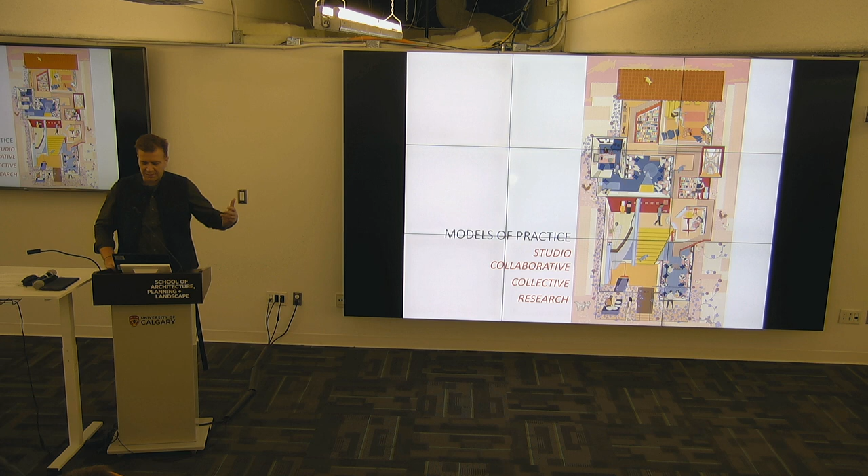This is all, of course, in retrospect and hindsight, that one thinks there are four models that have emerged within my own practice. The first one is, of course, very traditional.

It's the idea of someone coming to you to give you a project, and then you work with the person to produce it. Here, in this case, it's up in the north—a house built out of timber screens that open and close, located in a peri-urban part of a northern city. It's symptomatic of other such development throughout the country, where the architecture also tends to become a marker for development that is to come.

Or there's the idea of collaborative practice, where you often work in places with various actors who have a lot more skin in the game. You're constantly working with people to produce projects.

In this case, a temple that we built with local villagers out of stone, where the villagers would work on the project in their spare time. Between tilling fields, in their off-season when they weren't farming, they were physically building this community temple project. This is, in some sense, a collaborative effort.

So we played not just the role of the architect—and this is not the architect in the traditional sense—but someone working with the villagers and the priests to actually produce the design as well as the project itself. The third aspect of the practice is this idea of the collective.

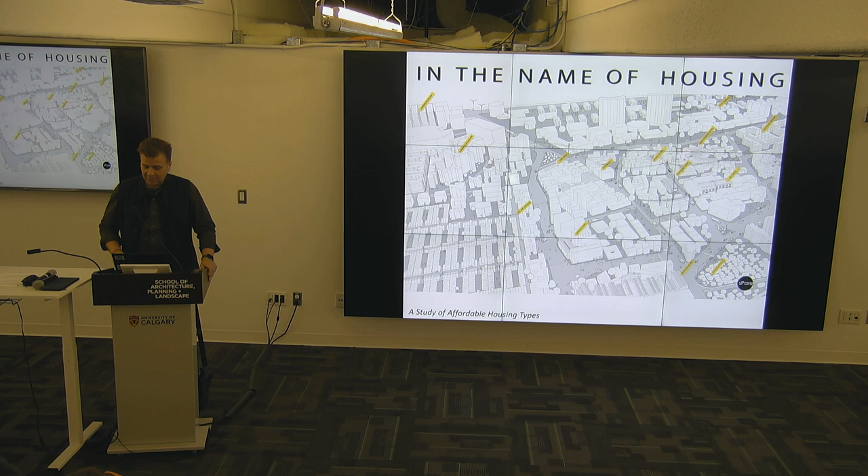And lastly, the 4th model that we've been working through is this idea of research. Typically what happens in our context is that research is seen as something academic and not really connected to practice. What we've been doing really is research that is looking at housing and housing type, as well as building code, in a way that it can inform both policy and hence inform practice as well. So that's really the kind of models of practice that we operate through.

The second part of the presentation is really looking at questions that we've been asking ourselves in the practice, and looking at how these questions play out within the value propositions that we need to address across many projects, but also specifically in the few that I'm going to show.

The first one is: how lightly can you actually touch the ground? The fact that you're working with resources that are extremely valuable and will keep becoming more and more scarce. Is there a way for us to actually start looking at, through various techniques, to try and lessen the load that natural resources would be consumed on particular projects?

When the client first suggested that we work on that site, we were a little apprehensive because of the number of trees on the site, and we were wondering if there was a way for us to actually build without impacting a single tree, and what the connection between that grove and the actual project would be.

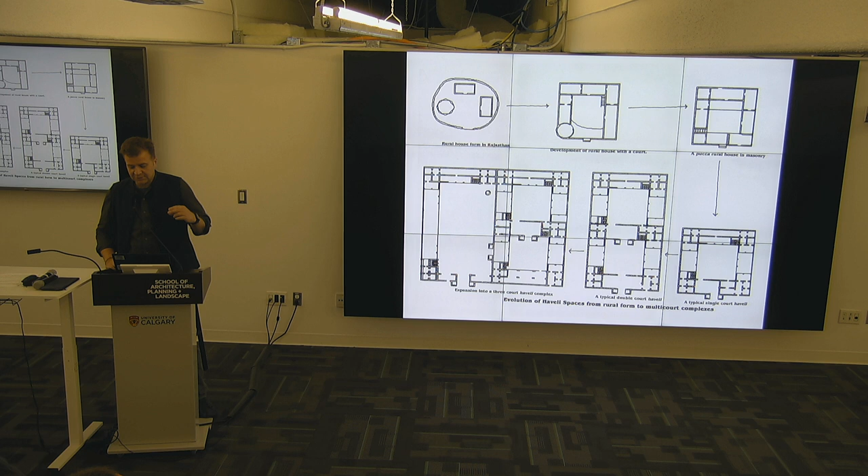There is a kind of development form of the house that goes from the village module at the top, which is just 3 rooms surrounded by a kind of wall, to the final city house at the bottom, which coalesces into the city fabric in the town of Jaisalmer that is also close by.

It was such a site that we were actually given for the project, which was for a student hostel. This town is a center for students from all over the country who come to study for centralized engineering exams, very coveted and very tough exams to study for. The entire economy is driven by hostel accommodation for these students—about 200,000 of them migrate here every year to study for those exams.

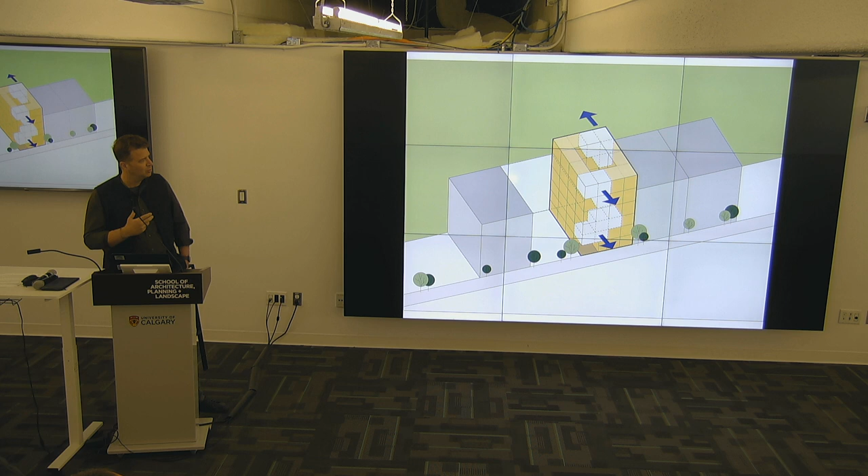What also happens because of this intense kind of movement, and the fact that these hostels are almost like warehouses for students, there is an extremely high rate of student suicides, the highest in the country. That's partly because of exam pressure, but also because the architecture they inhabit is extremely unsympathetic to those pressures and doesn't allow for any social space. So what we were trying to do is see if the block we were working with could work with porosity to allow various social spaces to form, and also work climatically.

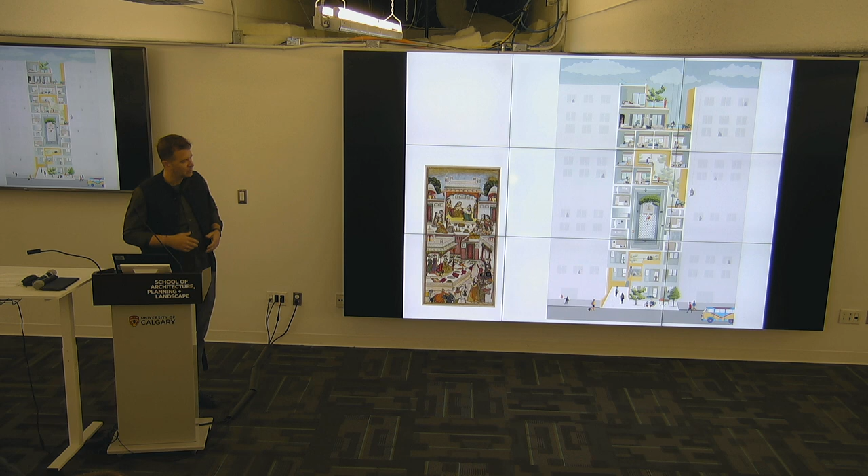So, as I said, we were trying to build within this dense fabric, but at the same time produce a kind of porosity that would allow air to move through, as well as produce spaces for social interaction. And that is the project.

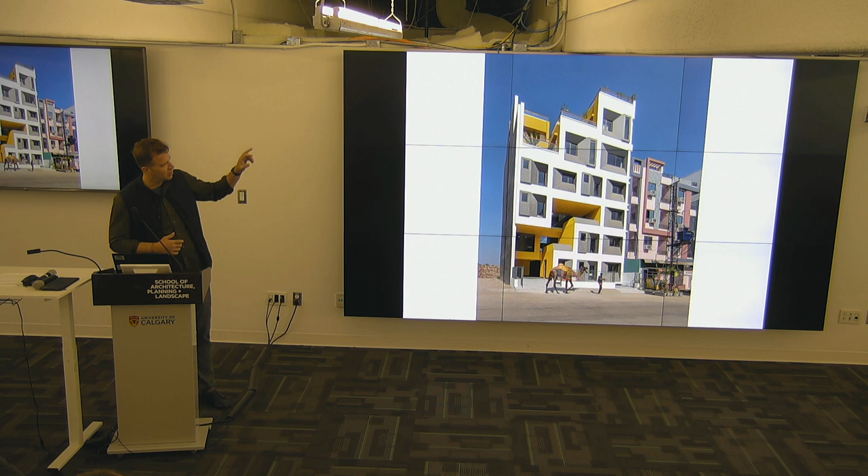What you see here on the left is the entry into the project, and all of the rooms, structured around a central courtyard, are where the students stay. It also learns from traditional modes of fenestration, including micro-perforations that cool air to allow for natural ventilation. We extrapolated that to produce the entire building facade, which is about 3 feet thick, allowing us to mitigate some of the harsh heat conditions we face.

It also creates an interesting relationship. The terraces create a relationship with the street and the ability to communicate across the section, which is a dominant feature in a lot of our older towns.

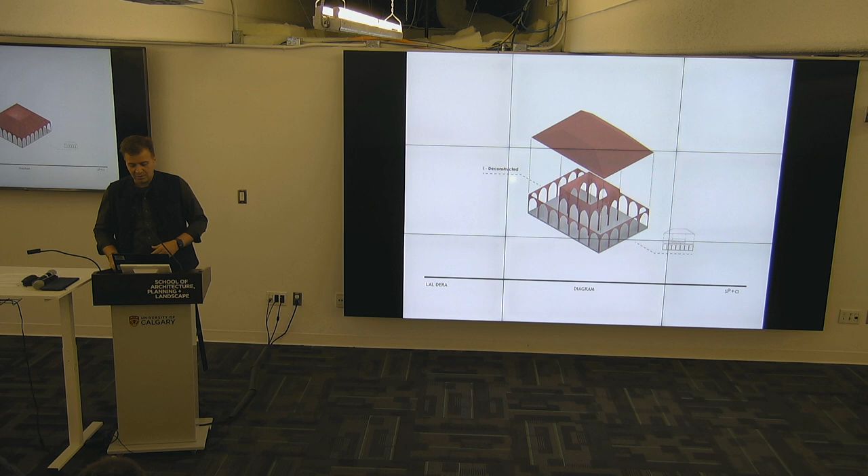Another project we did, a very small pavilion in Mumbai, was supposed to be a tribute to an old Mughal 17th century hunting pavilion built out of fabric. It's a gorgeous pavilion that's in the museum. What we were doing was building a kind of tribute to that. We worked with the geometry and the components of that original pavilion, and then took that apart.

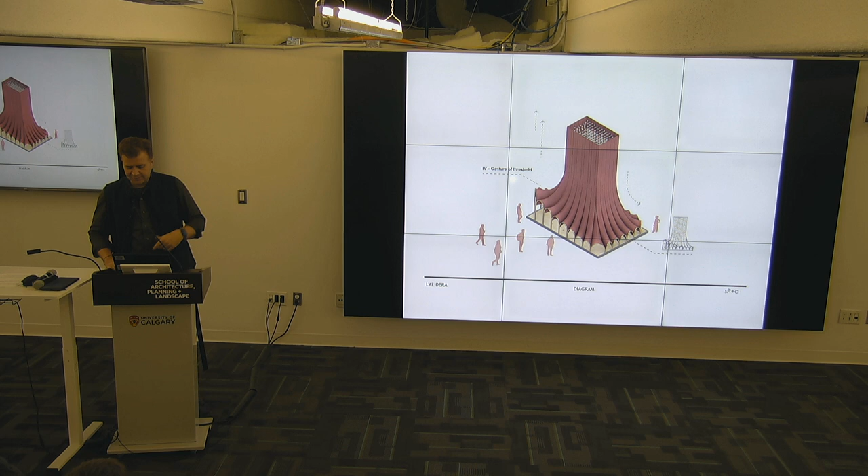The space we were presenting in was a massive volume, almost 4 floors high. What we were doing was basically looking at the form of the pavilion extruded up to the height that we were sitting in. And this was up for about 2 weeks.

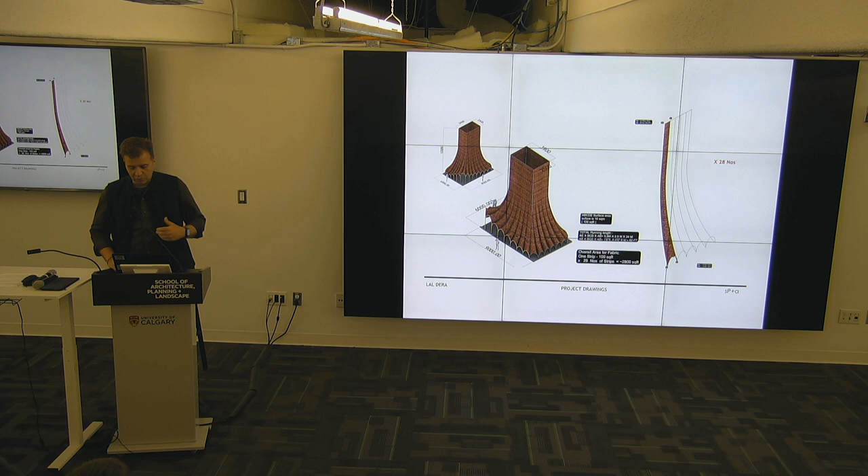We unfolded that entire fabric and panelized it so that you were able to get the exact sizes needed, and then stitch. But the thing is, the entire project was built by 2 tailors, very commonplace people who stitch clothes. Just 2 tailors and a Singer sewing machine took all of the panels, stitched them together, and then did very simple details of hooking the fabric panels and tensioning them onto little rods at the bottom. That's the final project.

The other question we've always been asking ourselves is how do you define context, given that we're building a project in a particular place. There would be a context of the immediate environment we build within, but there are also knowledge networks we sit in, which now start talking about context that goes beyond the geographical boundaries of what your site is restricted to.

This is a small project, a library we've done again in rural Maharashtra, for a small school. This is from 2017, I think. What we were trying to ask is, what would kids interface with more? Would they prefer a kind of building, or would they prefer landscape? Even as an adult, if I see a mound of grass, I want to walk over it rather than just looking at a building, right?

So what we were trying to do was look at how we create a landscape that could be a kind of architectural building. While we rendered whatever we did, we went back into history to look at ways that free-form architectural vaults were done. The final knowledge system was a combination of...

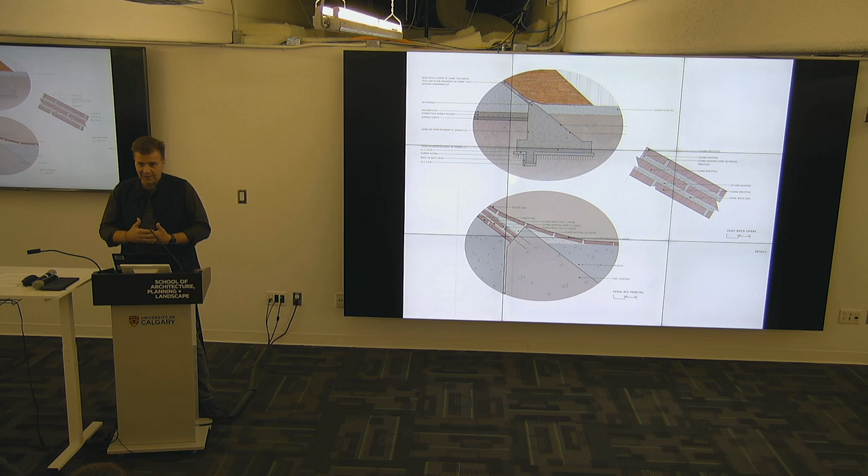The building touches the ground only at 5 places, and it's built as a construction system that uses 3 layers of brick tile, with no RCC except for the foundations. We did the first mock-ups on site, and they worked fine.

But the big question was, how do you build a project like this, which requires complex formwork, which is extremely expensive? To do a curved formwork for a structure like this would be beyond the budget we had for the project. We then worked an entire system of formwork using local rebar that the contractor was going to use to construct a slab in another project, and we used that to lay the first layer of tiles. After the first layer set, we removed all the rebar, and it was used by the contractor to cast another slab in another project. So there was 0 cost of formwork. That's the project after the formwork rebar was removed.

It's about 150 feet long, 25 feet wide, and 4.5 inches thick. It's a kind of landscape that you can walk on.

The interior, since it's a compression structure, you can't really have any upthrust, so everything is off the ground. You can see the fans in that space are pedestal fans that are designed around a stand from the ground.

The window profiles are striated because with the striation, they become stronger. If I was doing straight windows, they would need much thicker sections and hence be more expensive. The top part of the window above the transom is completely made out of mesh, so it allows for air to move through. The temperatures inside during summers are at least 5 to 6 degrees cooler than outside.

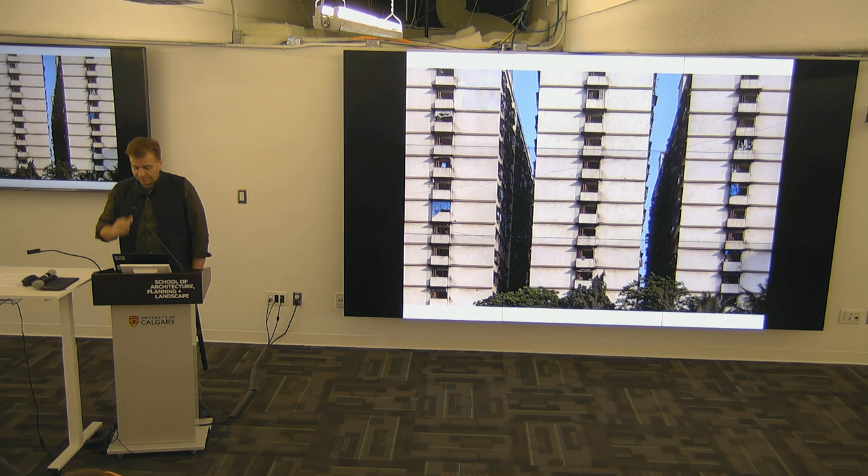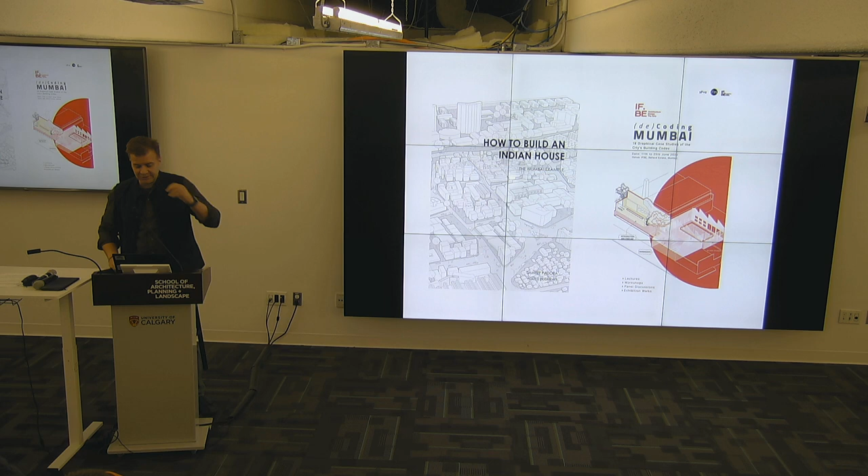So it was this that prompted our research to first look at the idea of type—what kind of type existed in the city, in Mumbai, for affordable housing that we could study and learn from. That led to our exhibition called In the Name of Housing. And what we found was there were these incredible models of housing that existed within the city that we had completely forgotten about. There are about 5 kinds of these housing.

We weren't really getting into the narrative of how people describe their lives here, but really looking at metrics to see if we could produce a comparative of projects being built today and the way they were built in the past—to look at circulation space, to look at social space, and to examine these projects primarily from a data point of view.

And we found that there were incredible dependencies that came through all of these projects—the fact that they needed to be part of networks, they needed to have systems open to change, that shared space was as important as private space, and that these spaces also needed to expand over time as families grew. It's not just about the big moves you make on projects, it's also about the small things—the details.

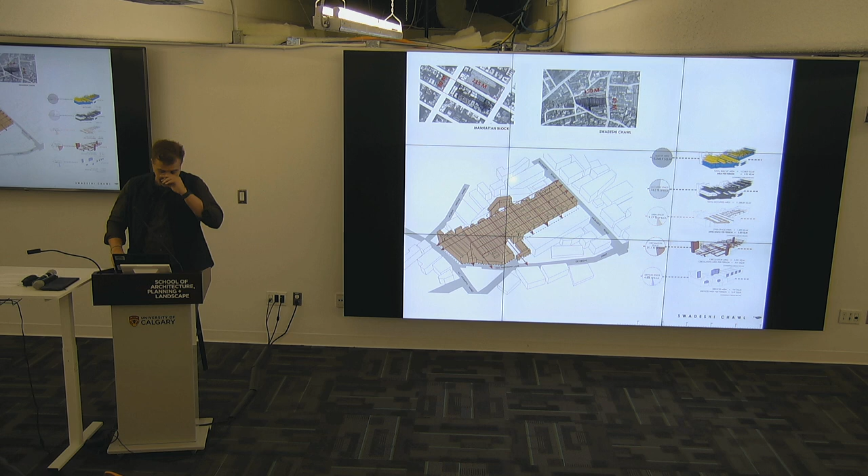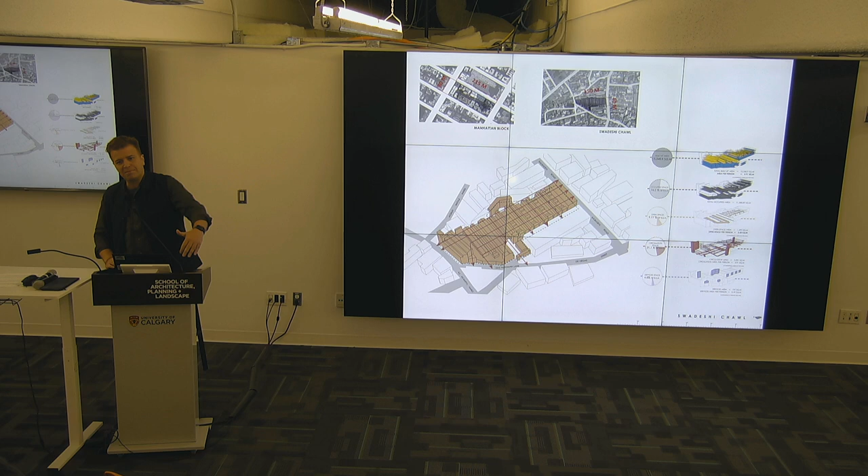This, for instance, is a project in Bombay built in 1898. It's roughly 3/4 the size of a Manhattan city block. It's owned by one individual, but unlike mixed-use projects built today, the city doesn't stop at the edge of the building—it actually moves through. The lines you see in red at the bottom are streets that allow you to go from one part of the city to the other, primarily through the building itself.

What you see here is a fairly innocuous looking building on the outside, but when you start moving through it, you get these incredible double height streets with cloth markets on both sides. On the upper level, there's a kind of podium with courtyards and housing for these shopkeepers. This project, built in 1898, is extremely sophisticated—2 completely different grids sitting one on top of the other. A lot of this was prefab, brought here from America actually. It's a project we've kind of forgotten about.

Similarly, like I said, it's not just about the big idea in a project like this, but also about the small detail. This is a small, very tiny apartment with a 1 meter, 3 feet wide corridor. This gentleman has actually built a loft in his apartment, and what he's done is also build this little ladder—just 2 pieces of wood and 2 hinges—that folds out whenever you need to access the loft, and folds back into the wall. This would make IKEA proud. It's really an incredible invention. There are lots of these that exist. I'm not going too much into detail of other things we found, but yeah, this is one of them.

Our next question was, if all of this fantastic fabric existed, then why can't we do stuff like this today? The answer kept coming back that it's really because of the building code and how regulations have started looking at housing as just square footage, as real estate, not from a livability point of view, which has produced some really terrible projects.

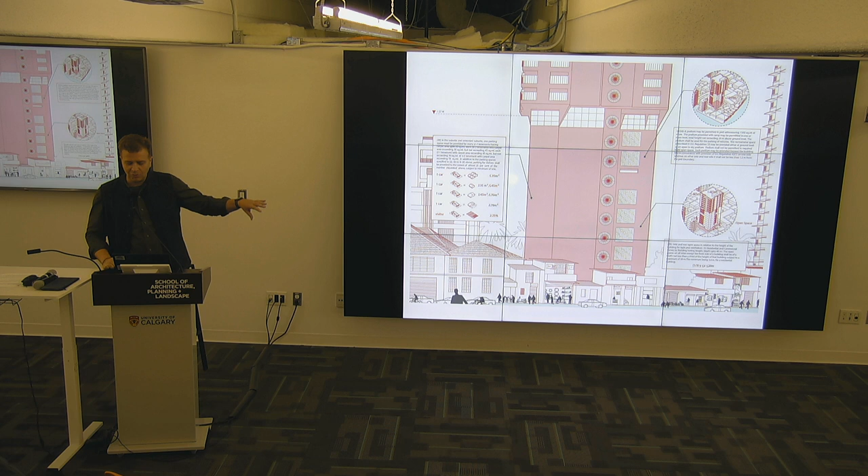What we were then doing through our building code exercise was trying to break that down to understand what are the rules that got us to a point where we are doing things like this.

It also allowed us to go back and look at the meta view of Mumbai, to see the kind of construction happening in the city - there's literally no greenfield. Everything is a redevelopment project, which means breaking down existing buildings and rebuilding with new FSI you're given. There's a growing belief that the problem of housing in Mumbai is that we don't have enough FSI to build with.

We are given like 3 FSI to work with. But actually, if you look at all the exemptions built into projects, you're already building at something like 12 or 13 FSI or FAR, depending on what you use.

The fact is, while densities seem to be increasing, the scale of individual projects seems to be reducing. So they're all getting super dense, but also on super tight plots, which is completely obliterating the sense of the city in between. You're looking at development through the lens of the plot, not the neighborhood.

This only gets further intensified as we look at slum redevelopment projects. Currently about 60% of Mumbai lives on about 9% of Mumbai's land, which has slums. But over time, once redevelopment happens, the same population is going to live on 3% of Mumbai's land. So we're really starting to talk about futures of density in a way we haven't seen before.

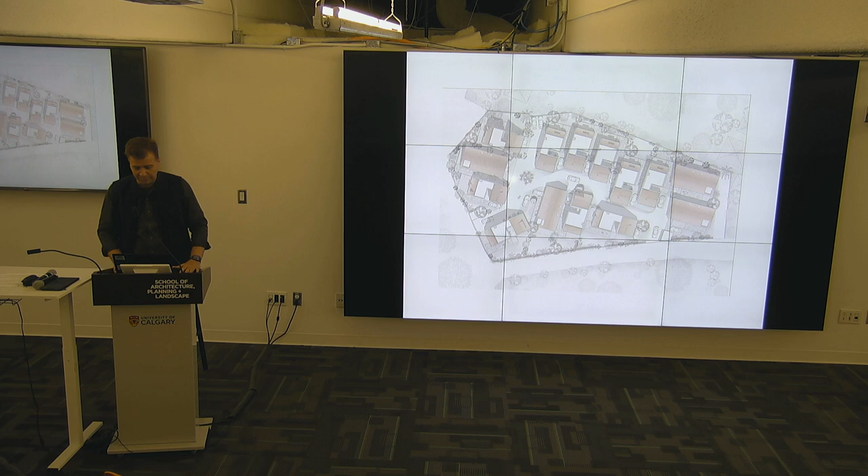This is an image that actually points out our development at the bottom here and the village on the top left. These are images of the housing itself and of that street, and how all the public programs within the house, the living rooms and dining rooms, actually front the street, and the balcao or entrance portico then becomes a point of engagement for all the residents to have that sense of community and engagement with each other.

The material that we are using here is a local stone, basalt, and clay tiles for the roofing.

This project is a competition that we were finalists for last year. This was ICON's Initiative 99 international competition, looking at using 3D printing for production. We've been working with recycled waste 3D printing in India for the past year and a half, and it seemed like an interesting idea for us to work on.

It was a project where we were supposed to produce 3 houses as a prototype to build on a site in Austin, Texas. And what we were trying to do was look at a format that would allow us to generate common walls that would, in some sense, reduce costs, but also create this kind of tight structure that would give us more print.

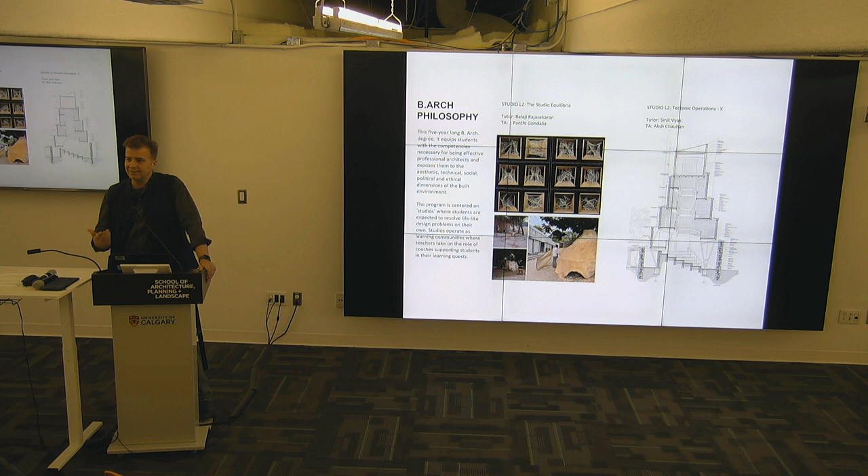In the Faculty of Architecture itself, we have the bachelor's program, master's, and a doctoral program as well. The undergrad program works with the idea of the studio unit, so we offer about 40 studios in the undergrad program every semester. These vary from full-scale projects, like on the left-hand side, a full-scale paper-mache mock-up of a form-finding project, to the right-hand side, where we look at traditional skills of hand drawing but use the section as a means to produce a building.

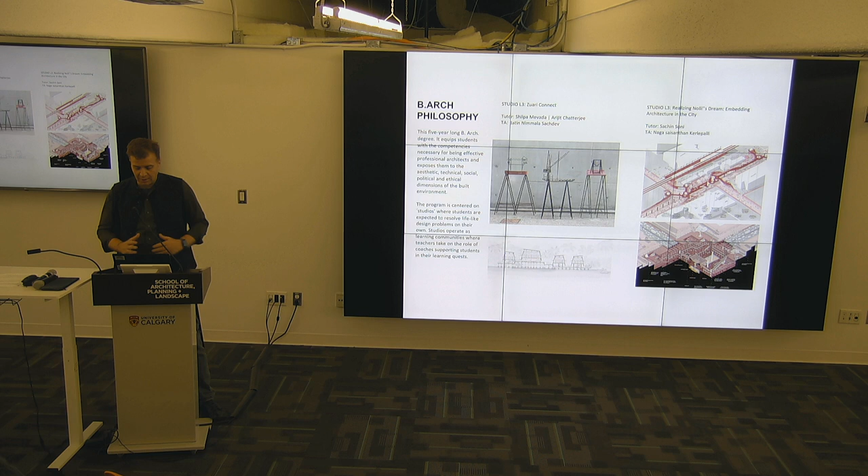We're also simultaneously working with people from other disciplines. On the left-hand side, that entire project is a joint studio offered by an architect and a filmmaker, and what you're looking at are speculative scapes of a future world. The one on the right is a project done by Sachin that looks at scale, and the idea that multi-scalar operations could produce different effects and inhabitations. In this case, looking at rural infrastructure on the left, and infrastructure of cities and metro stations on the right, and its impact on the production of precincts in the city.

Then our master's programs look at the incredible heritage that we have, both from the idea of conservation and from the idea of intervention. How do you actually document, how do you legislate, and how do you advocate for these kinds of projects?

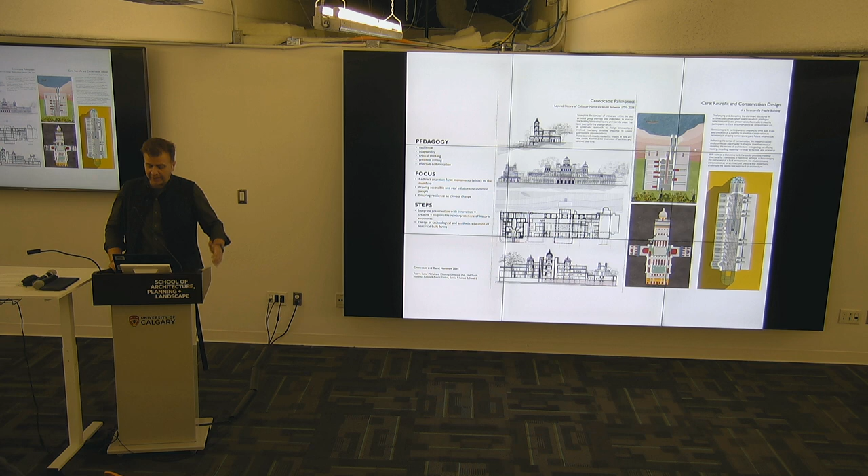In the Masters of Landscape program, we are looking at climate change, but also natural preserves, forests, water systems, and traditional knowledge systems, and how these have been dealt with natively.

In the history and research program, we tend to look at existing landscapes, not just of built form but also processes, to allow students to explore both the logic and the presentation of what their investigations actually produced, a kind of an archaeology of sorts.

In the case of our interior design program, it's actually one of the most popular programs in our faculty, and one of the few masters of interior design programs in the country. The interior renovation industry in India is valued at about $500 billion, and it's really a massive project, so there's huge demand that we're trying to work with in terms of material, projection of technology, how you look at fit-outs, and so on.

The housing design program—like I mentioned, housing is an extremely important touchstone, both as a political and as a social enterprise. So we have a Master of Housing program that specifically looks at the production of housing, both through the lens of technology as well as the lens of type.

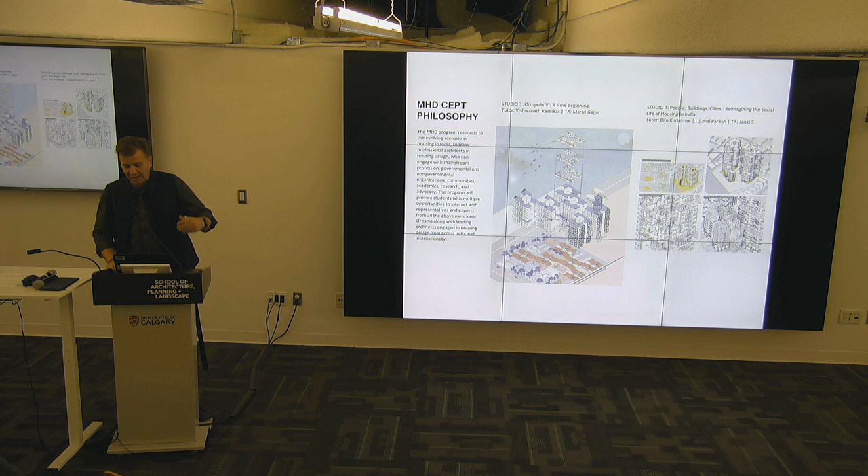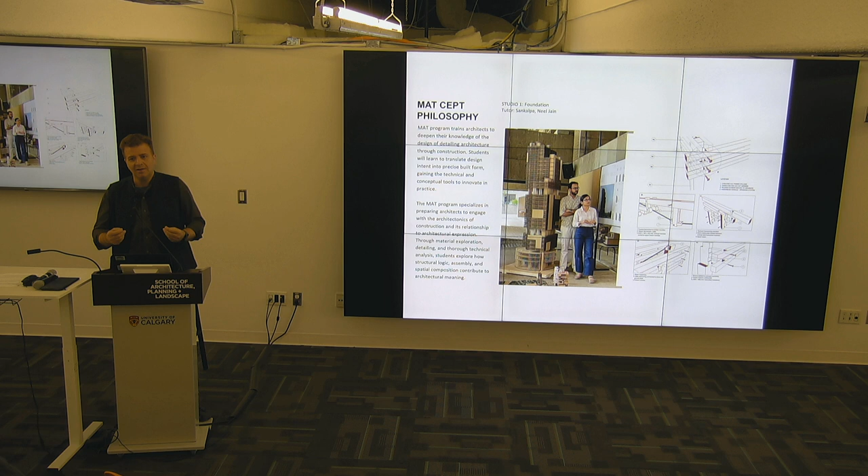Then lastly, a Masters of Architectural Tectonics program, where we look at the idea that mid-career professionals often need experience with ways to put buildings together, not in a conceptual sense but in a pragmatic, detail-oriented format, and this program services exactly that.

So I'm just going to end with some of these values and questions that I spoke about, and how these values point to the idea of frugality, diversity, appropriate technology, protecting history, and the fact that there needs to be a kind of synergy between these various disciplines that operate within the production of the built environment. Thank you. And that, in my sense, is the Indian way of thinking.

Thank you. Thank you very much.

That was really amazing. I was in India about a year ago, and I have to say this mix of the old and the new, the technology and invention, it's very Indian, and it's incredible.